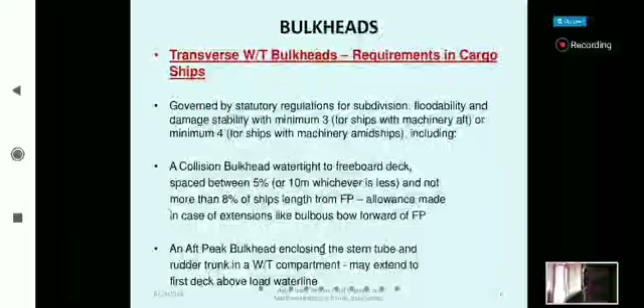These distances are measured from forward perpendicular. However, if there is a bulbous bow, then the location from where you take these distances is slightly different. You take it slightly more forward, because the point from where you're measuring is slightly forward of the forward perpendicular. You will understand this better when we do the calculation. For the time being, this is enough.

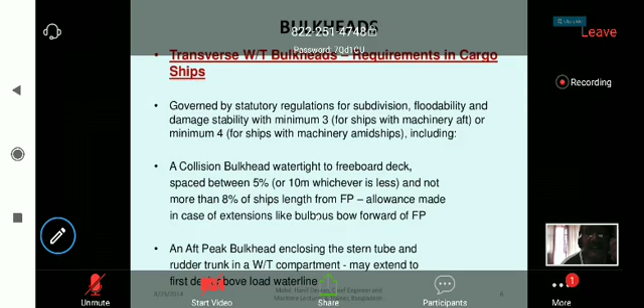Aft peak bulkhead is also compulsory on ships, and its purpose is enclosing the stern tube and rudder trunk in a watertight compartment. They may extend to the first deck above the water line, so it's not necessary to go up to your main deck or freeboard deck. They may extend to the first deck above the load water line.

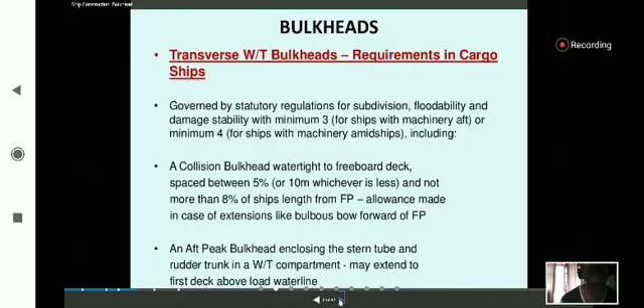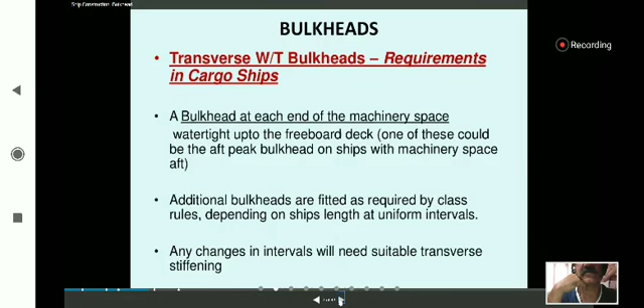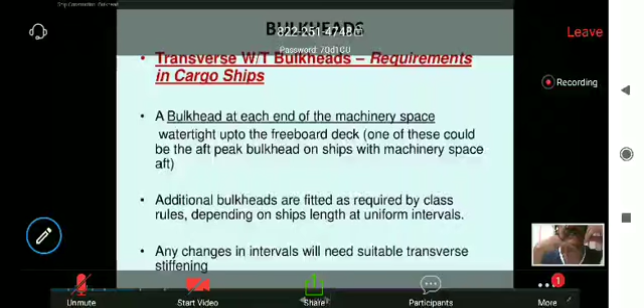Next is transverse watertight bulkhead requirement in cargo ships. A bulkhead at each end of the machinery space, watertight up to the freeboard deck. One of those could be the aft peak bulkhead on ships with machinery space aft. So on cargo ships, additional to your forepeak collision bulkhead and aft peak bulkhead, you have additional bulkheads at each end of the machinery space - meaning forward and aft of the machinery space, you have a watertight bulkhead, and this bulkhead should extend to the freeboard deck also.

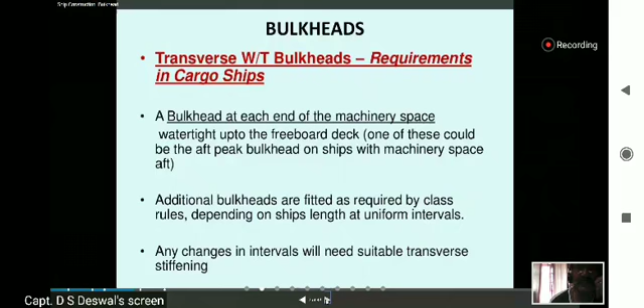Additional watertight bulkheads are fitted as required by class rules depending on the ship's length, at uniform intervals - that is, more than the minimum number of bulkheads given. Additional bulkheads are required depending on the length of the ship. So up to around 65 meters length, these minimum bulkheads can be there, but more than 65 meters, additional bulkheads are also required, and they have to be fitted almost at uniform intervals. Any changes in intervals will need suitable transverse stiffening. So uniform intervals is almost not compulsory, but it is better to have them. If there are differences that affect the strength of the ship, there should be additional stiffening.

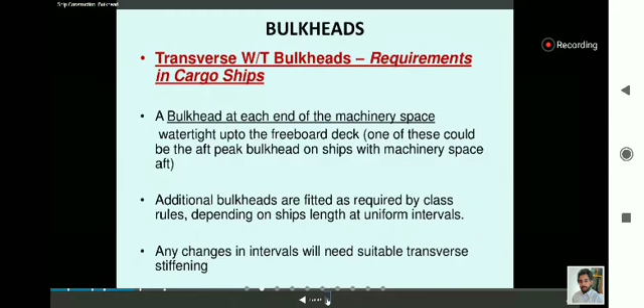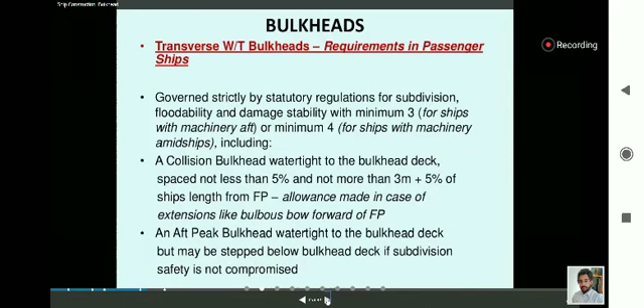These transverse bulkheads on passenger ships are governed strictly by statutory regulations for subdivision, floodability, and damage stability, with a minimum of 3 bulkheads with machinery space aft, or 4 bulkheads with machinery space midship. So there are stricter regulations, even stricter than cargo ships. There may be an additional number of bulkheads, and their location depends on the subdivision, floodability, and damage stability requirements.

Collision bulkhead watertight to the bulkhead deck, spaced not less than 5% and not more than 3 meters plus 5% of the ship length from forward perpendicular. This is now the same requirement for both cargo ship and passenger ship - minimum is 5% of the length or 10 meters. That is for passenger ship also. In the slide something different is written, but in SOLAS it is the same for both passenger ship and cargo ship: minimum distance is 5% or 10 meters, whichever is less, and maximum distance is 8% or 5% plus 3 meters of ship's length, whichever is more. This allowance can be made for extensions like a bulbous bow from forward perpendicular - the same thing applies here also.

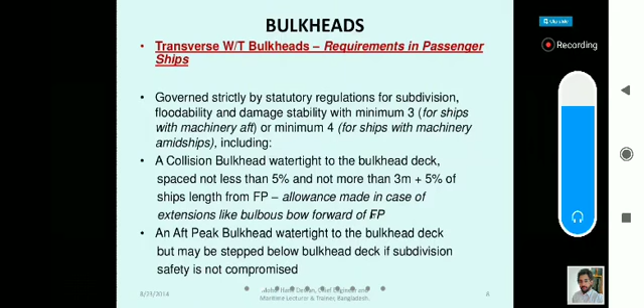Aft peak bulkhead, watertight to the bulkhead deck, may be stepped below the bulkhead deck if subdivision safety is not compromised. So there is a possibility of stepping your aft peak bulkhead. Other bulkheads can also be stepped within certain constraints, but the aft peak bulkhead is more easily stepped.

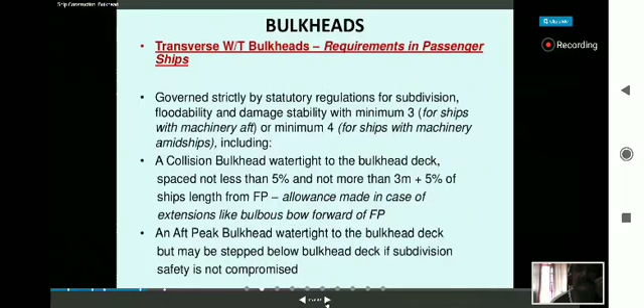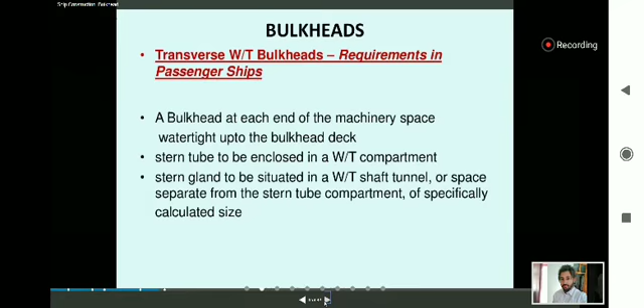By design, we have two main types of bulkhead: plain and corrugated. We will first discuss plain, then corrugated bulkhead. Plain bulkheads are also very common. It is the traditional design of the bulkhead. Plain bulkhead is also called flat bulkhead, or conventional or traditional bulkhead.

Watertight bulkheads, because of their large area, are formed of several strakes of plating. They are welded to the deck and tank top. The plating strakes are horizontal and the stiffening is vertical.

Since water pressure in the tank increases with depth and the watertight bulkhead must withstand such loading, the bulkhead must have increasingly greater strength towards the base. So from top to bottom, the strength increases, and we have to increase the thickness of the plating. So the lower strakes of plating are thicker than the upper strakes. This is achieved by increasing horizontal strakes of plating towards the bottom.

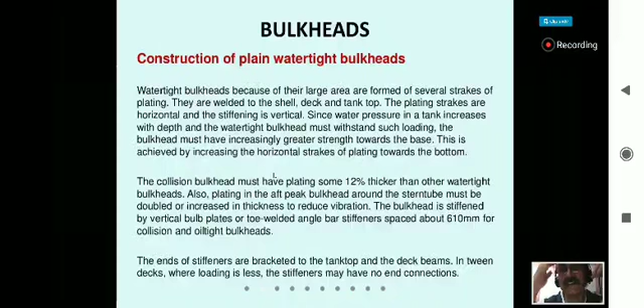Now, the collision bulkhead must have plating some 12% thicker than other watertight bulkheads. This is as per class requirements, it is not given in SOLAS. So class requirements normally require the collision bulkhead to be thicker than other watertight bulkheads.

Also, plating in the after-peak bulkhead around the stern tube must be doubled or increased in thickness to reduce vibrations. So the after-peak bulkhead is also of increased thickness because of vibrations, to reduce those vibrations.

The bulkhead is stiffened by vertical bulb plates or toe-welded angle bar stiffeners, spaced about 610 mm for collision and oil-tight bulkheads. Other watertight bulkheads have spacing of about 760 mm. But collision bulkhead, after-peak bulkhead, and oil-tight bulkheads on tankers have spacing between stiffeners of about

610 millimeters. Ends of the stiffeners are bracketed to the tank top and the deck beams. So these bulkheads have got stiffeners, and these stiffener ends are bracketed. Bracket means you use brackets there - directly we don't weld the stiffener to the deck, we end it with a bracket.

So the bracket is basically a triangular plate. One bracket will be at the bottom, one bracket will be on top. The top bracket can also be called similar to a beam knee. Beam knee is on the sides, but here it is bracket only.

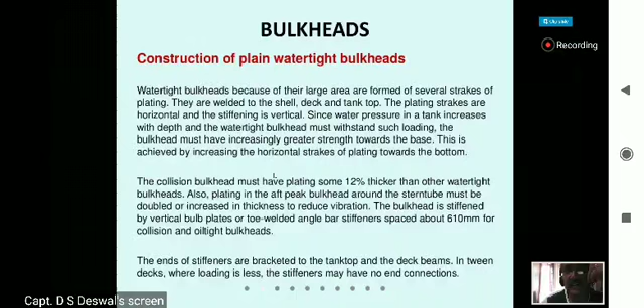In tween decks, where loading is less, the stiffeners may have no end connections. Tween decks are normally found on general cargo ships, and in tween deck, the lower end of the stiffeners may not have brackets, but below the tween deck, beam knees will be there. Unnecessary brackets will hinder the cargo storage, so we want to avoid that.

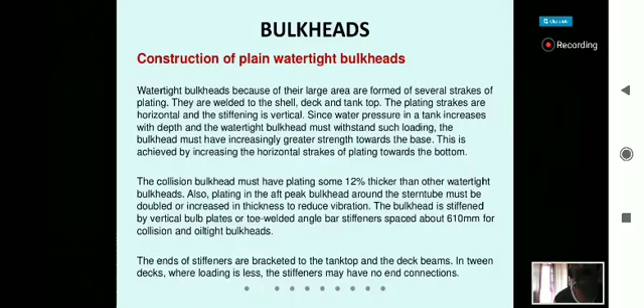So that was this page.

Now this is one of the very important diagrams that normally comes in your course, and it is also available in your book, D.J. Eyres. You can practice it from there also.

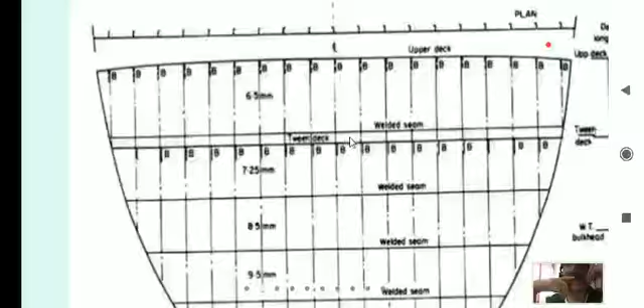Very important diagram. In this diagram, there are three views of a plain bulkhead. This view is your end view looking from forward. If you are looking from forward, this is starboard, this is port, this is top, this is bottom, and this is your tank top. Below the tank top, this is your DB tank, and this plate from port to starboard is your bulkhead.

This bulkhead is made of several strakes. So the lower strake here is 11.5 mm thick plate, then 9.5 mm thick plate, this plate from here to here, then 8.5 mm thick plate, 7.25 mm thick plate, and 6.5 mm thick plate like this.

So this ship also shows a tween deck. Tween deck means it is a general cargo ship. So on general cargo ships also you have plain bulkheads with stiffeners. So stiffeners are basically these vertical lines which are shown here in this sketch - they are stiffeners. These horizontal lines which are shown here are

joints between these plates. They are called seams. Okay, so these plates - this plate is also not one plate, there are vertical joints also in between. Those plate joints are called butts, but they are not given in the diagram. But horizontal joints are given because this is a more important weld seam between different strakes. Vertical joints will not be in one line, but this is in one line here.

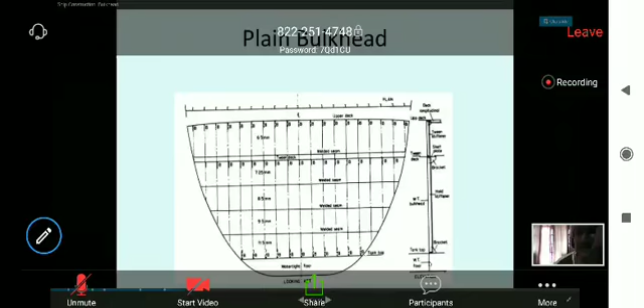Other than that there will be solid floors and bracket floors also, but this one is special, which divides your DBs. This side will be one DB, other side is other DB. So under the bulkhead this type of arrangement is there: floor, then there is a horizontal plate, then you have vertical plate going up. That vertical plate is your bulkhead, and this bulkhead has got stiffeners on one side.

So this design is there. Now there is a triangular plate here, then there are brackets, triangular plate here, and then there are bracket, triangular plate here. Okay, so this may be some shelf plate for the tween deck.

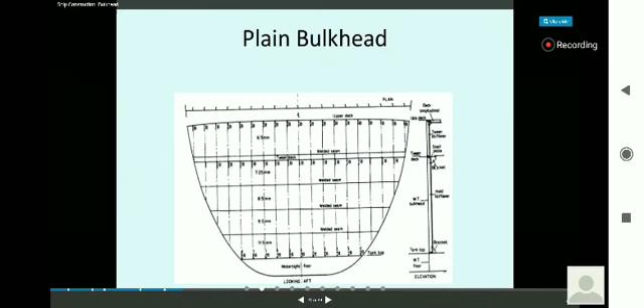Ashish, I just want to ask one question about these stiffeners.